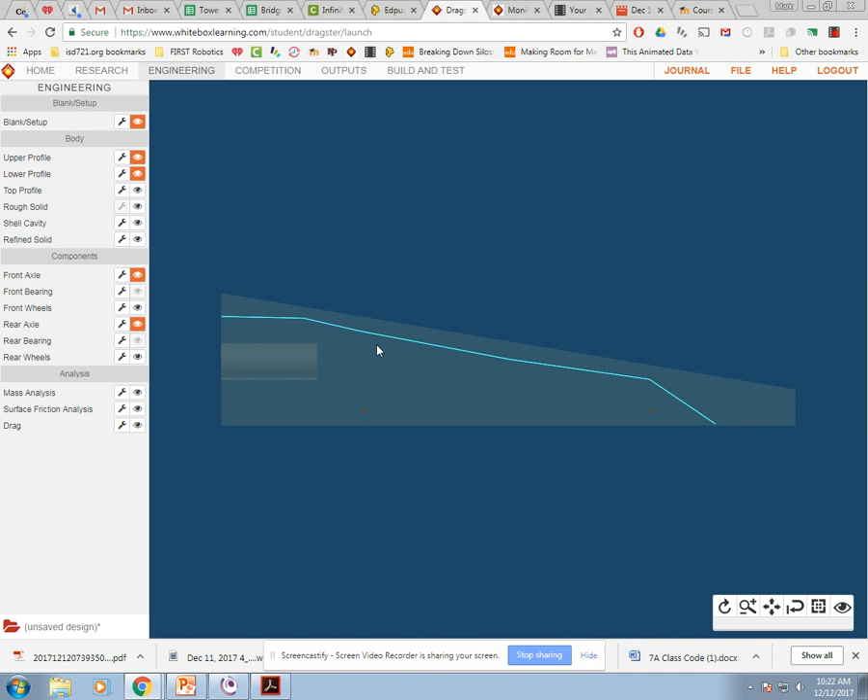So now we will work on the lower profile. We already have the upper profile we just did. To work on the lower profile, we do the same thing: turn on the lower profile. Again, nothing happens since we haven't constructed anything yet. Then we turn on our tools for that, and the same tools and graph come up with measurements and stuff like that.

So what we're going to do is continue drawing the lower profile. The lower profile is underneath the CO2 cartridge hole, and it goes along the bottom of the car. We especially need to focus on where the axle holes exist because we have to work around those.

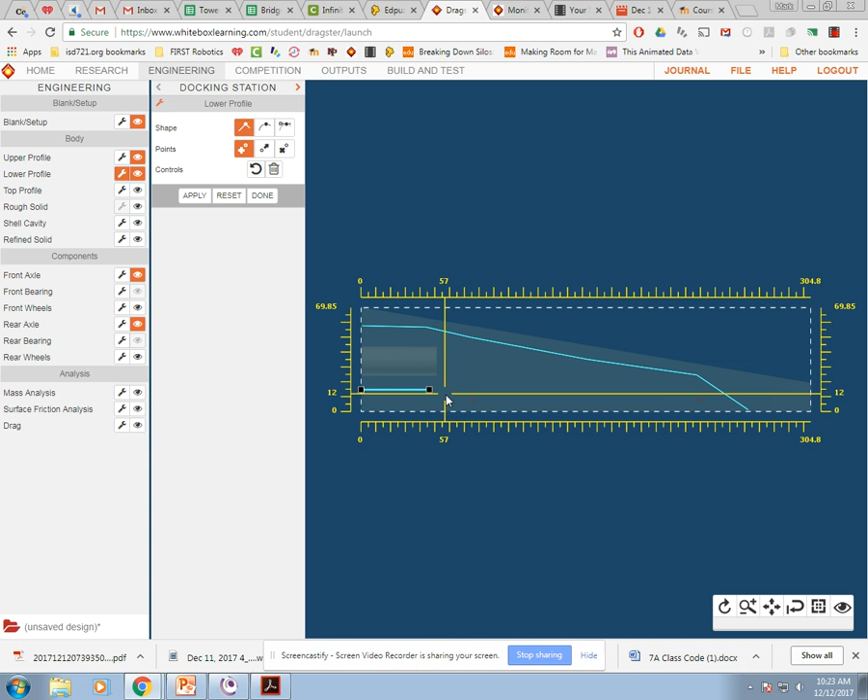I'm going to leave it at my lines and just add some points here. Make sure your points go all the way back to the very back. Then I'm going to draw some lines, bring it down here—I'll tell you why we do this in a little bit—and bring it up, come back down, come back down over here, and then to the end of the car, just like so.

So now you can see I have my lower profile in with my dots, and I can still rearrange and move these up and down, change them a little ways and so on, so it makes it where I want it. You can still do your adjusting and what have you.

A couple things you need to know when you do this profile: this particular dot, along with the dot here in the upper profile, make sure it's all the way to the very back and on this dotted line. Otherwise, when you check your specifications, it'll tell you the CO2 cartridge hole is not deep enough because it thinks you're cutting through it. So take it all the way back, make sure it's all the way back.

The other thing we need to do is where the axle holes exist, we need to make sure that our line is all the way down to the bottom of the block also. So our line should be right along that dotted line also.

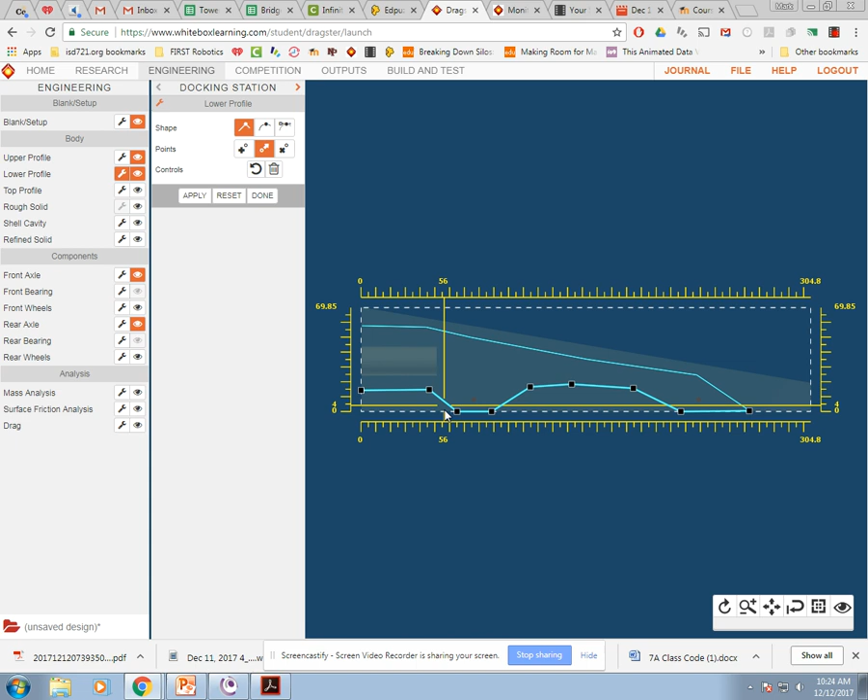I always come down here and put it down, but I'm going to come down, and since I'm on move, I'm going to take it and make sure it pulls all the way down. I'll grab it and make sure that pulls all the way down, so I know it's all the way down. I'm going to do the same thing with this one and the same thing with that one—just make sure it's all the way down.

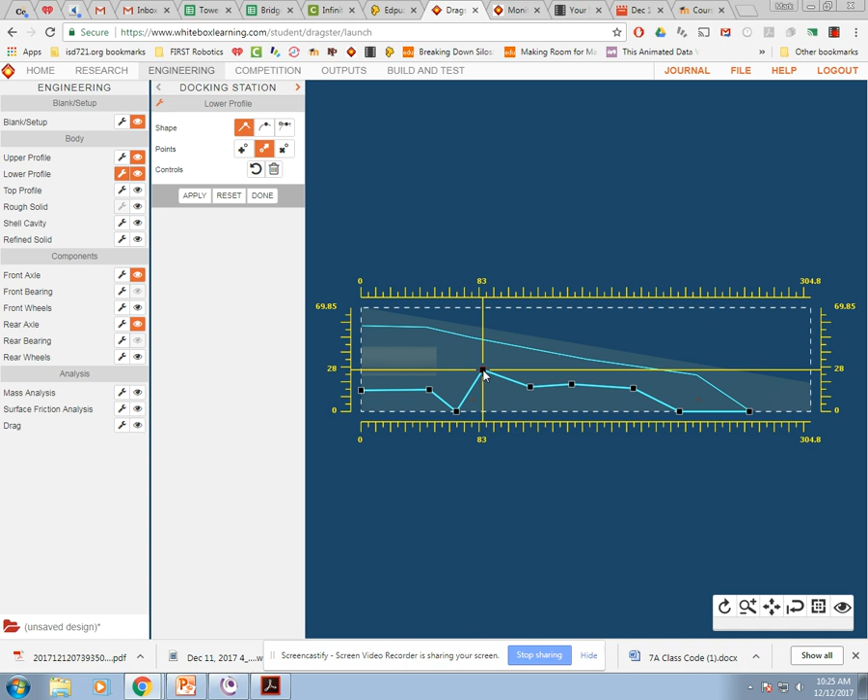We need the axle hole to be near the bottom of the car like this. I can't put it above the car—I can't do that, because as of right now you would cut this portion out, and your axle hole would not exist on your car. So we have to bring this down.

Give yourself plenty of room in front of and behind the axle hole, because when you cut your car out in reality, you may cut really close, and you'll need to put some stuff underneath your car eventually—you'll find that out when we do our construction. But you need to have space underneath your car, underneath your axle hole. So leave space around that axle hole just like that.

So right now you have your lower profile basically completed. You can still always go modify it according to your specifications, just like you can modify your upper profile. I'm going to go back up here and apply it.

I'm going to click done. So now let's say if I wanted to go back and change one of these profiles, I just go back and turn on the tools for that profile, and the dots come back in place. Now I can sit there and readjust some things, maybe tweak it just a little bit here and there, and so on and so forth.

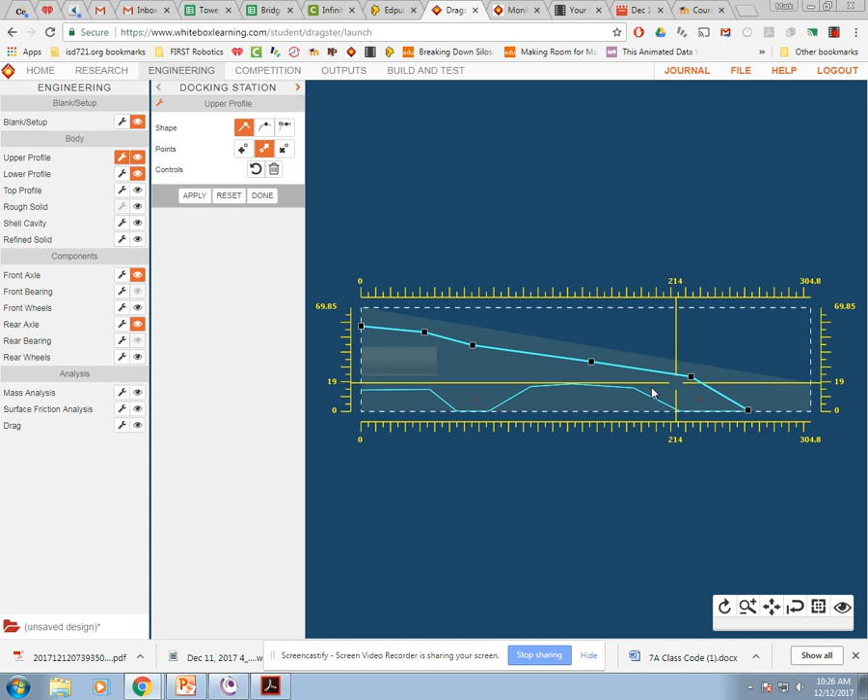So, I'm going to make sure that's all the way back. And so now I got my design. I'm going to apply. Remember, always apply and done when you're doing that.

So now the one thing is, if you notice, we can look at both upper and lower profile at the same time so you can kind of see what the side of your car looks like. We're going to now go to the top profile.

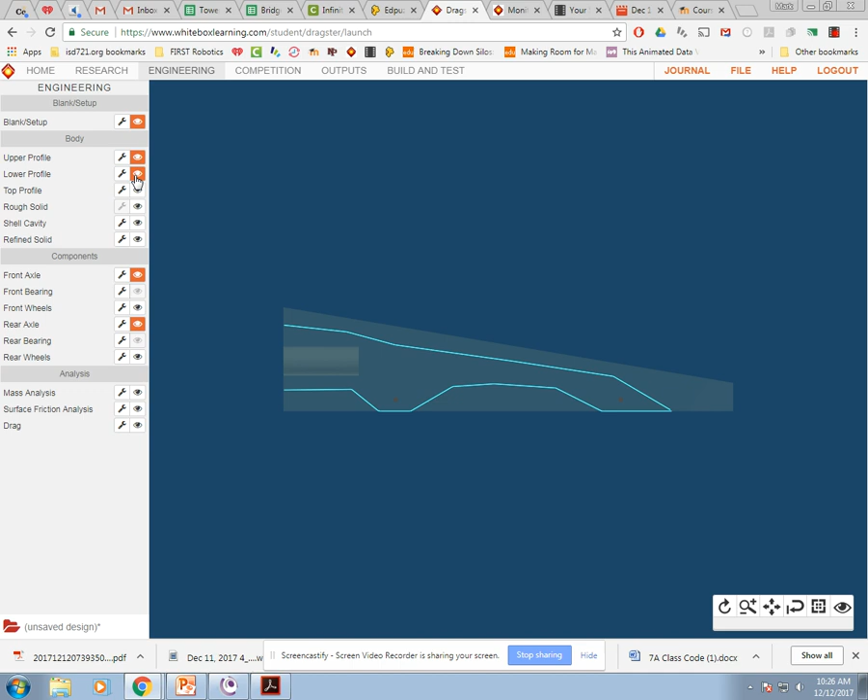The top profile is going to turn your car and look at it differently. But before that, you need to shut off your two profiles, then turn on my top profile. If I turn on my top profile, nothing happens, but as soon as I turn my tools on, it turns the block of wood, so now you're looking at it from the top view.

So now you can see a completely different look of your car. You still have the same length, but your width is different. If you notice, your width starts at 0 in the middle, going to 20.635 to both sides. Same thing here, leaving your axle holes in there, now you can see where your axle will go through your car, here and here. Whoops, I did not mean to do that, so I'm going to go and delete that.

There we go. So now what I'm going to do is go and design my profile of the car, my top profile. The nice thing is when I design my top profile, I can put my dot here, and I'll put a dot over here, and if you notice, down in the bottom, it mirrors the exact thing I just drew.

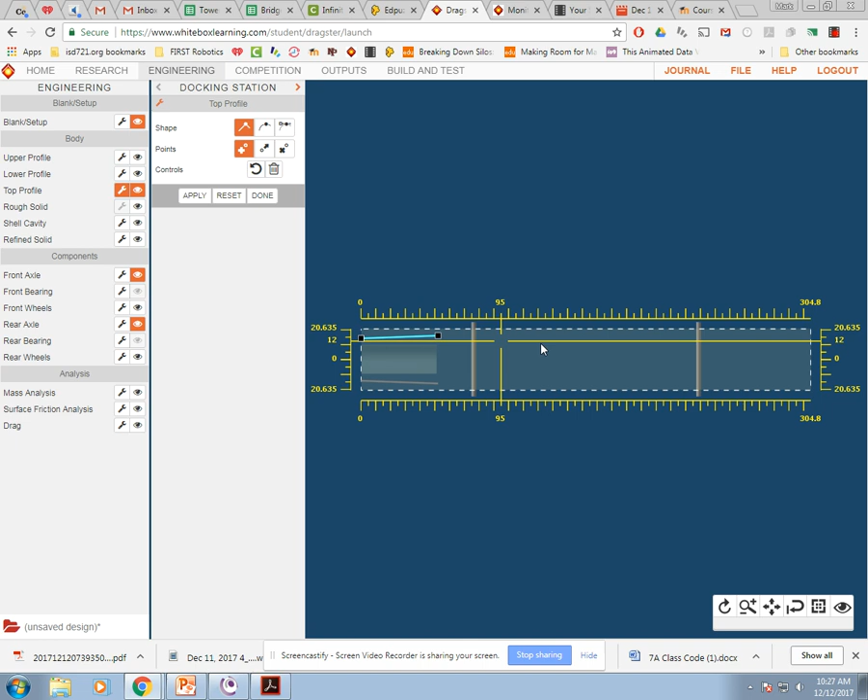So since it mirrors it, you only have to draw one side. It automatically draws it on the other side, so you don't have to try to match things up. So I put another dot over here, and a dot here, then get skinny in the middle, put a dot over here and right here, and bring it all the way out over here. So now I have that, and you can kind of see how my car is designed.

One of the things you're going to want to look at, just like we did in the other one, is where is the axle hole? And do I have my body width as wide as the block? In other words, is this dot and this dot and this dot and this dot all the way to those dotted lines, along with this dot being all the way to the back bottom line or back line.

You need to give some space in front and behind each axle, so when you cut, you don't end up accidentally cutting right through where the axle hole would be, because then your car is not the correct width.

Now, one thing I want to point out here is I went and brought my car all the way out here, and it's roughly 286 millimeters or whatever out there, something like that. So I brought it all the way out there.

I should pay attention to where my upper and lower profiles end. So in order for me to do that, first of all, I'm going to apply this, and done. So now it only shows you half the car, which is fine.

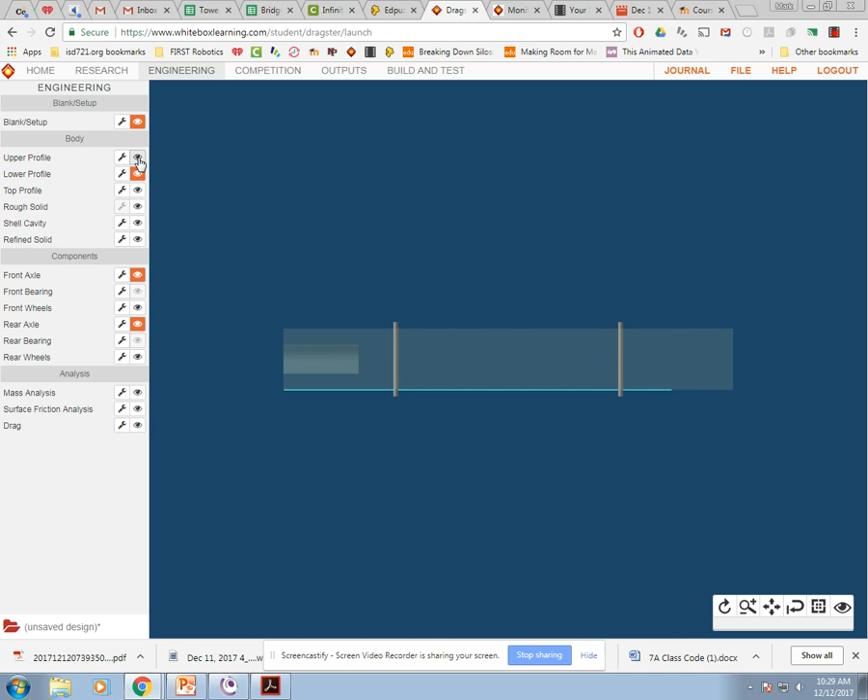But I'm going to go shut that off, and go to my lower profile, upper profile. I'm going to turn on one of them, doesn't matter which one. Now I'm going to look where my car ends. My car over here ends at 263. My top profile ends way over here. So those don't match up. We got to get them to match up.

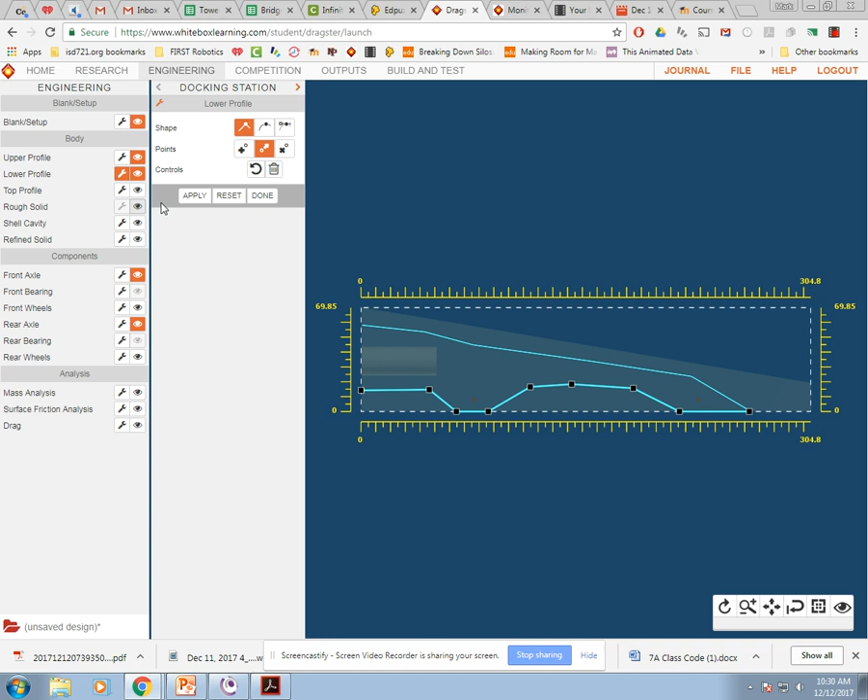It is so much easier right now to do this, to take my top profile and just shrink it down to this measurement. So I can shrink it down to 263. What I'm going to do is click done since I made no changes. I'm going to close these out, go back to my top profile, turn it on, and now I'm just going to take my end and move it back to 263. And then that's where my car ends, right there. So now I'm going to apply that and done.

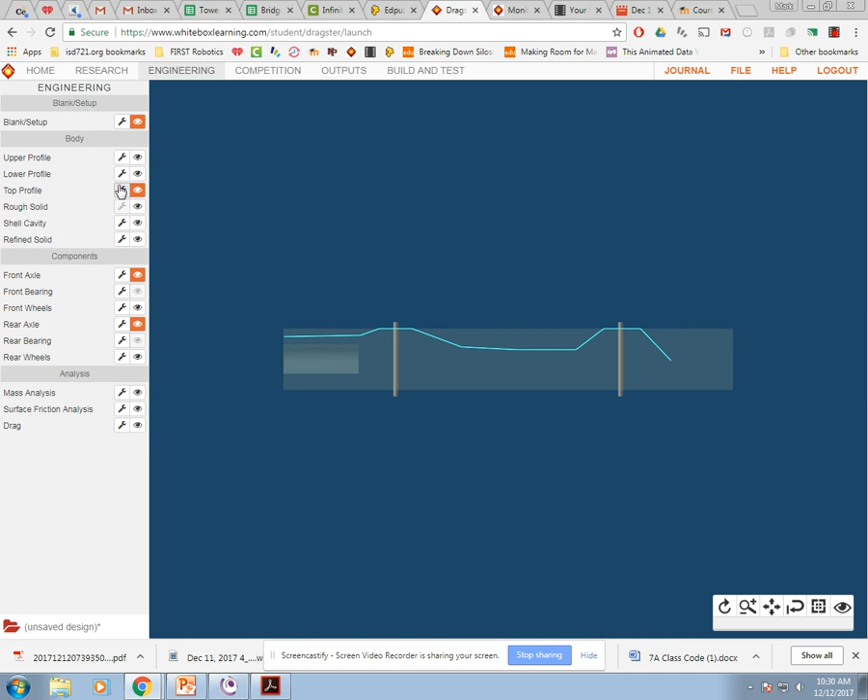Again, as you go through, anytime you have any of these three tools on and you view it, sometimes it doesn't turn out quite right because you can see these other lines in here and stuff like that. You probably don't ever want all three of them on. Always shut the top view off when you're looking at the side view, and always shut the upper and lower profiles off when you're looking at the top view, so you don't get confused by lines.

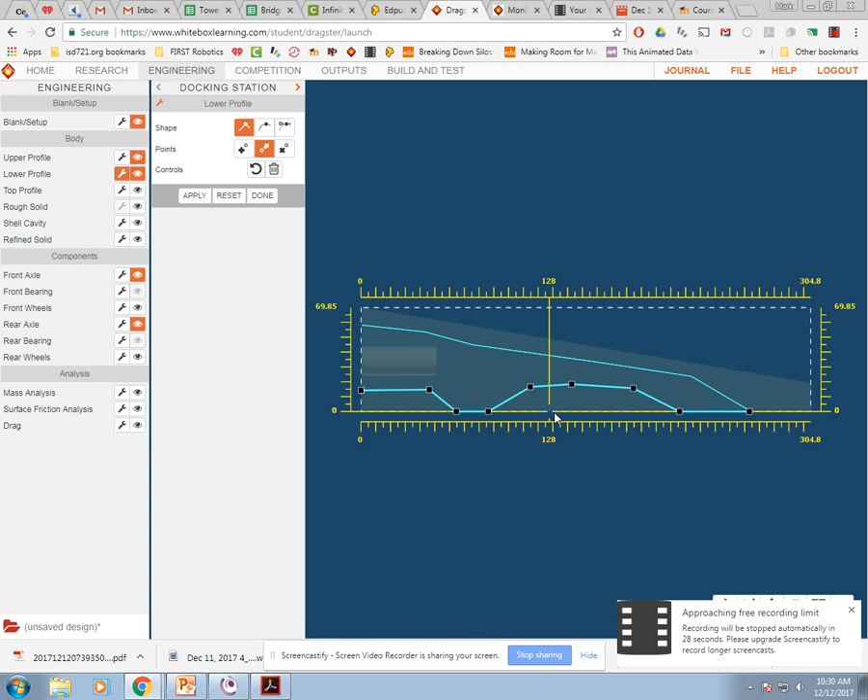So after you're all done designing and tweaking and stuff like that, you can then go and click done, and then we will continue on from there. But we will show you how to save these in the next video.